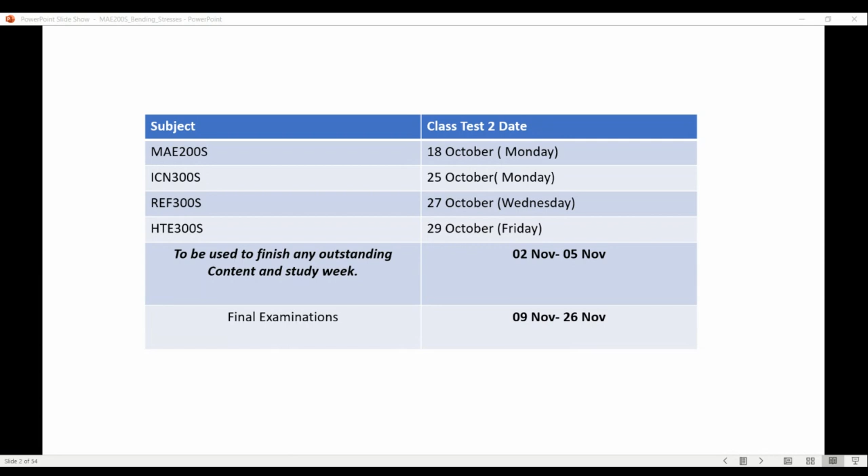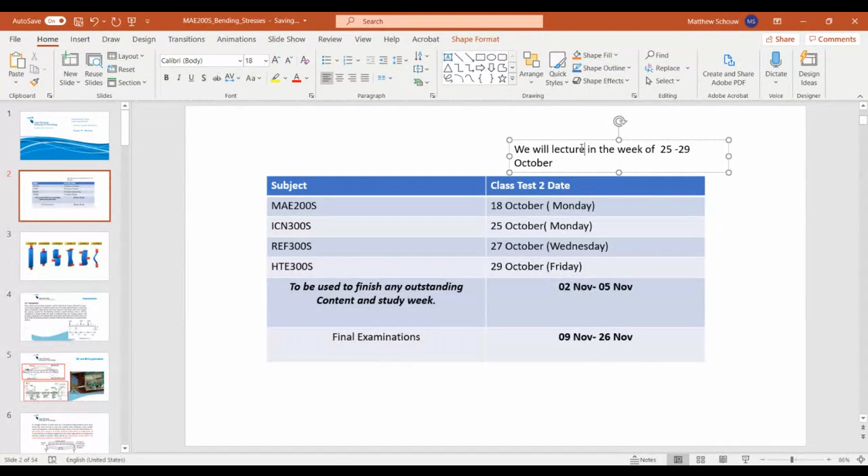All right. And then the other note which I want to include here. Let me just write it here. I will have lectures in between, unfortunately. We will have lectures, right? I should write that here. Lectures in the week. But it's probably like 1 or 2 lectures, just to push out the content. It's recorded, so you have it there. I'm just gonna put that over here. The reason I'm doing that is so that we don't run into that other week. That's my plan. Are there any questions regarding this before we move on?

Before we get into the theory of bending?

Students, let's engage. Musa. Mornings, Jason, Takifa. Yeah, the plan looks good. Thank you, Silas. Thank you. Morning, Musa. So yeah, like I said, I would share the dates. No questions. Okay.

Guys, don't have a lot of anxiety. You must believe in your hard work, and I've set everything up in a way that if you watch my lectures, it encompasses all the stuff that you need to solve. And I think it's challenging enough. We'll have classes. Whatever you've been doing, for the guys who know my flow, just keep along. A lot of students, I don't know if they battle with the content, which I don't really understand why, but you have to keep up the work. Consistency, you cannot bulk session the stuff. The stuff will kill you. You can't do it overnight. You need to keep up.

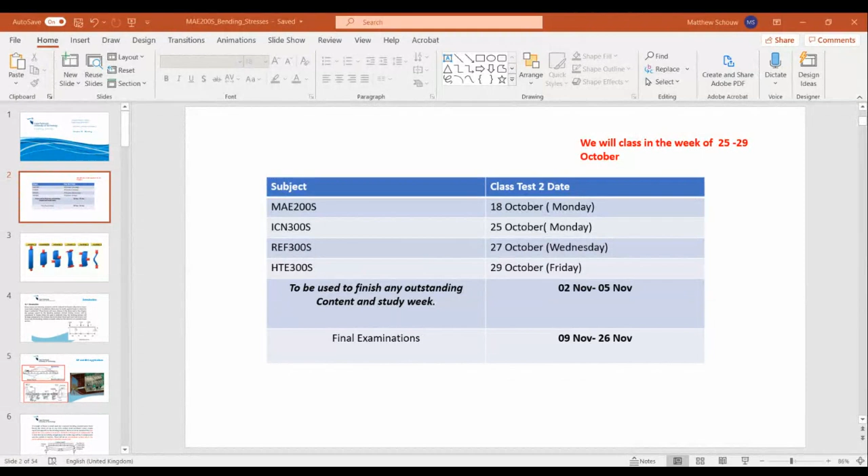I think maybe I should just put this in here. I'll have it over here while I'm here. What is this? It's a scope.

So bending, shear stress, shear stress, shear stress, deflection in beams, right? For electrodes, we're going with sync motors.

Sync and induction motors, this will be shared. I'm pretty sure I'll ensure that I share this. Transformers. It might just be this three, and then transmission lines.

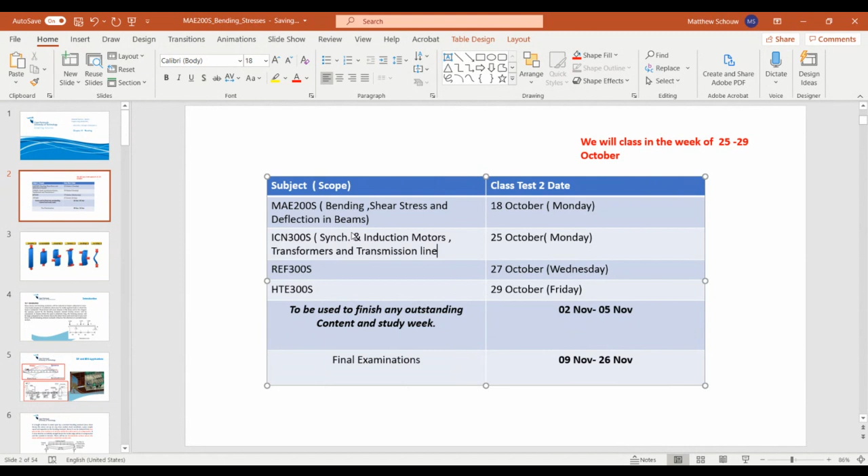Have a look here, I'm going to say something. And testing. No, I don't cover the testing chapter, Mr. Kasser. That's a theory section, right?

And you know what is so sad about that chapter is that I've literally done... I can't cover that chapter. If I were to cover that chapter, I would have taken you back to Mechanics, to the labs. I can't, it's just not part of it. We don't have time for that.

And the nice part about the chapter is because I worked in that field, I will give you the best stuff ever, promise you. I would have given you not the best, but I mean obviously I'm experienced in that field, so it's like the most proper thing ever.

And the reason why I asked, go for it. You recently said a while ago before test 1 that test 2 would be chapter 10, 11, 13, 12 and 14, or yeah, and then chapter 15 will be in the exam.

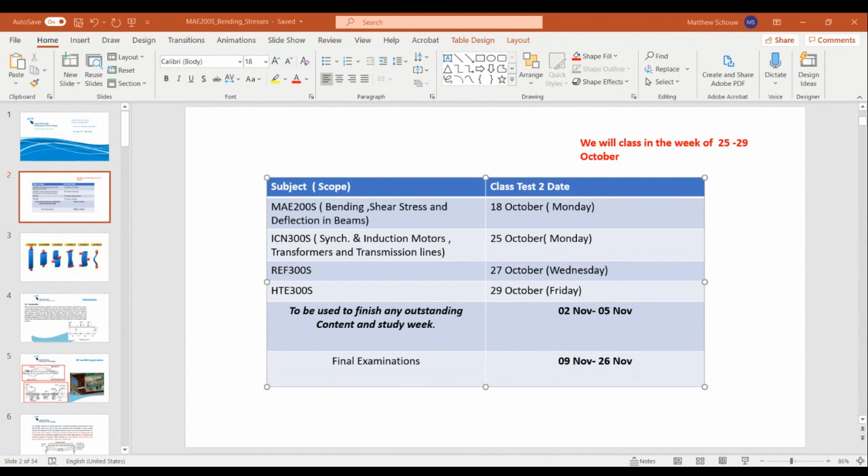So I think I made a mistake. I think I meant chapter 10, 11, 14, and then 15. 15 was in the exam now. So test 2 will be 10, 11, 14. Yeah, that's correct. Sorry about that, I see, you're correct, yeah. Should I have it in brackets here? 10, 11, 14, okay.

That's great, why did that happen? Okay. Yeah, because these, what do you call it, these sections are like a trilogy, man. Yeah, and buckling's on its own. Okay, yeah, so that's one. There's no real chapters here, so this is like arguably four sections.

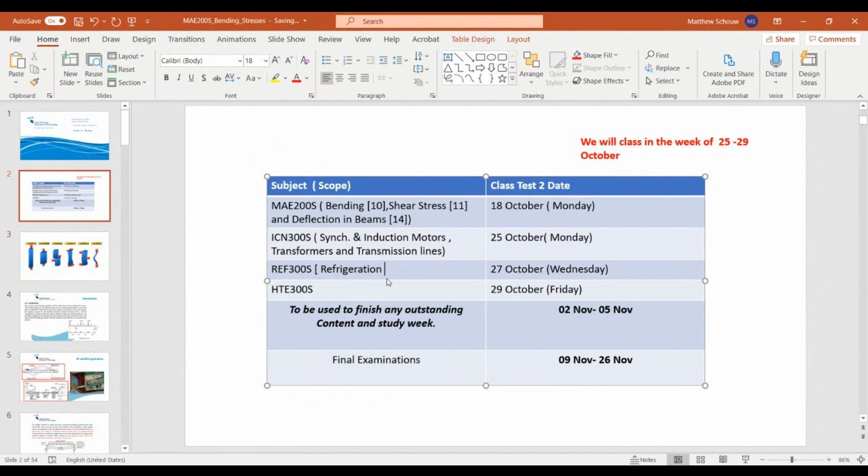For this, we're doing refrigeration section, heat transfer I'm doing after that, air compressors. Right, okay, so that's that.

If you do want to study it, just ask me. Somehow Alex does always ask me. Just that it's a bit tricky sometimes, depending on how I get the content. Heat engines.

This will be... yeah, that's too long to write, but I'm gonna say it's gonna be chapter... where's my theory of machines book? Just give me a moment.

Yeah, I have to just repost this. So chapter 12, 15, 16. And I wonder if I will get to gearing, but I have to see, but it might just be those two with gearing, or just gearing.

The thing is, ideally you want to hit around seven chapters, but it depends obviously, 6 to 7 chapters a subject. I'm just looking for gearing, I don't know why I'm passing it, I'm just looking at gearing. In fact, gearing comes with the other part, but it's just so tight, especially when obviously one spends time in chapter 12.

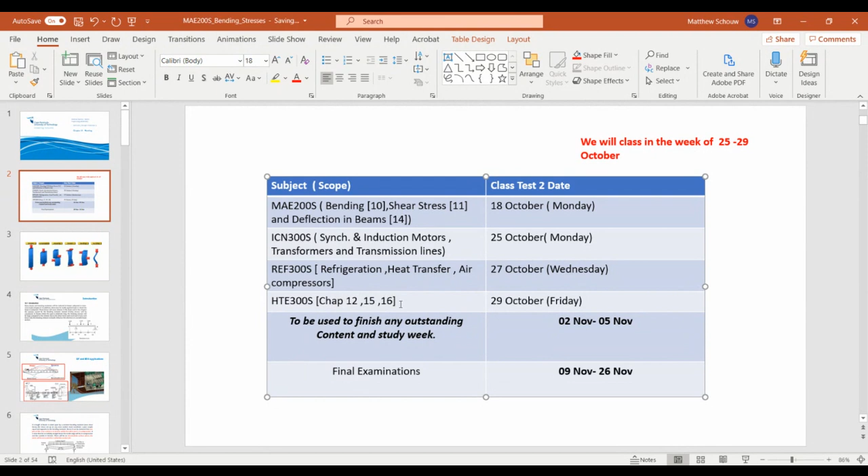It stands this, most definitely probably this, yeah. There's normally one chapter outstanding for the final. I hope that's clear to everyone. You guys get that?

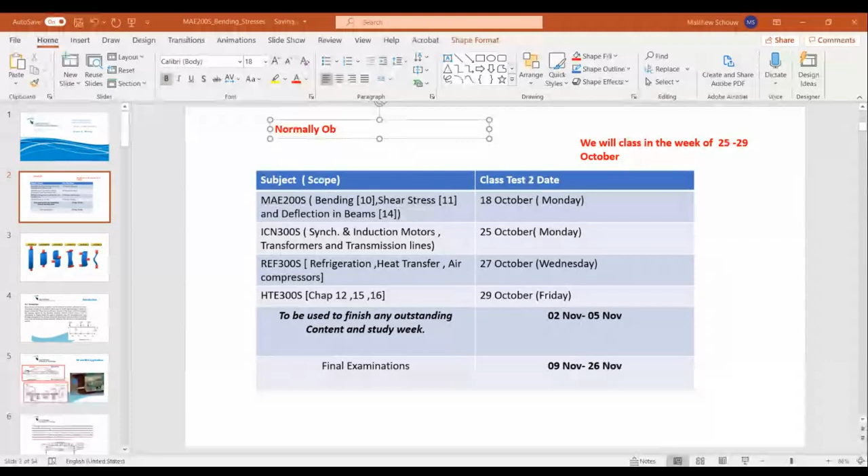Let's have it over here. I think Alex likes structure, man. Doesn't like... what are you talking about, for which subject?

You said there was a chapter outstanding. No, man, that's for all my subjects. I mean, we have one more chapter before the final. Oh, okay. Does it make sense? It's outstanding, one chapter will be covered before the time, covered for final. Normally.

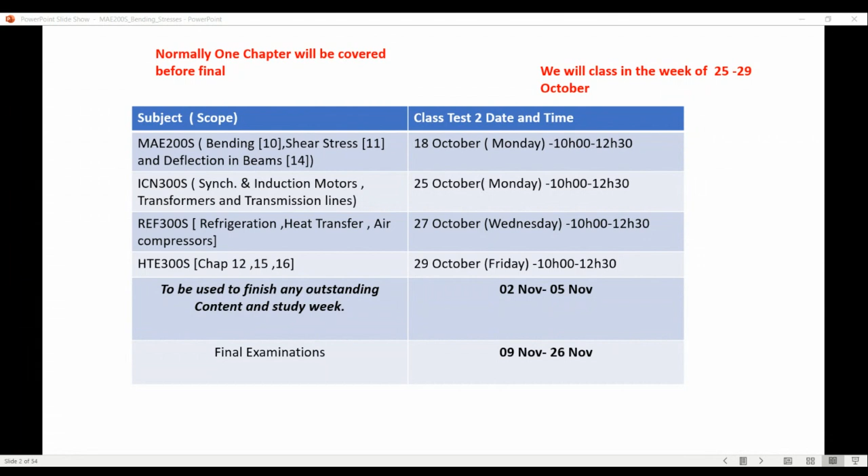All right guys, where are we? So in Strength of Materials 2, we started off with... before I jump the gun, remember I've mentioned to you there are essentially 5 mechanical types, 5 different types of loads in mechanics, right? And I'll just ignore the one on the buckling side.

Of course, that's the main loads. We also get, I guess, all the secondary loads, which I call primary, secondary being, you know, internal pressure due to fluid, like internal vessels, or temperature was another form of loading, right? But obviously I tried to unpack all the main ones. So we've done a bit of tension, yes, arguably done a bit of compression, right, so we've done a bit of tension and compression. You could say the sister and brother, right? They roughly behave the same for steels.

We've got a shear force, which I did cover well this time around, not like last year. I actually spent a lot of time looking at shear force, making sure you understand the area, if you remember your area and perimeter. And of course, on the shearing concept, you kind of went into torsion, right? So torsion would be the twisting force. We covered a whole chapter on that. That is chapter 4 in your textbook, if I remember right.

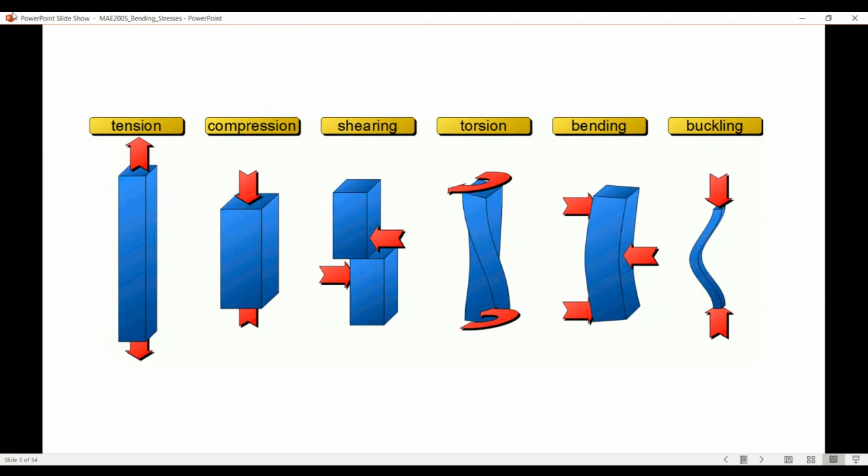So remember we talked about different loads, like tension and compression, that induces direct stresses in the form of tension or compression. We've got shear stresses, which is induced by torsion and shearing, and of course bending as well, which is bending stresses, but also in a different form - we'll unpack that here.

Now, this is a very important thing in the design of beams. In beams where the span is relatively long, the bending stress will be large compared to the stress induced by shear forces and the axial load, if any, and hence only bending stresses normally influence the selection of a suitable beam section, which we'll unpack.

What's important to note - if you have a ruler, for instance, and you fix one end, only about 10 mm, and apply a load on the tip, you notice a considerable amount of bending of the ruler. Normally beams, depending on how long they are, are most likely to fail by bending and not by shear.

With a shorter beam, instead of exposing the longer end, you flip it around and have only about 20 or 30 mm exposed, gripping the rest of the ruler on the other side, and start to apply a force downwards. Shorter beams normally fail by shear.

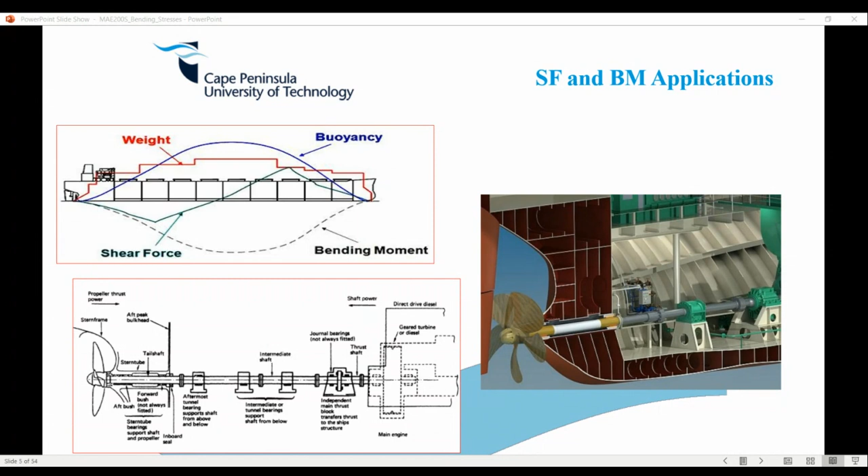Who's aware? I'm going to make a separate slide here and just paste a lot of pictures. Does anyone know the difference between a beam and a girder? Is anyone aware? Just checking.

So guys, we're boarding a bridge. We've got these I-beams over here - that's a beam. I'm going to look for a few more examples; every building literally has beams, right?

Remember, I told you a structure is composed of different structural elements, where truss is one element and beam is another. You can see beams running across here, and obviously that's a truss over there. So there's a beam again.

Size is the main difference - yes, that's it. Obviously girders are longer, beams are shorter. Essentially, you could say a girder is a beam, but a beam is not a girder.

So I'm just looking at some quick stuff over here, I'm nearly done. I don't want to unpack too much of it, but I'm sure you guys have seen beams. I'll just choose this one over here, maybe more wood-based, on the beam and girder thing now quickly. As engineers, whether marine or mechanical engineers, it's just something we really deal with - it's really in our trade.

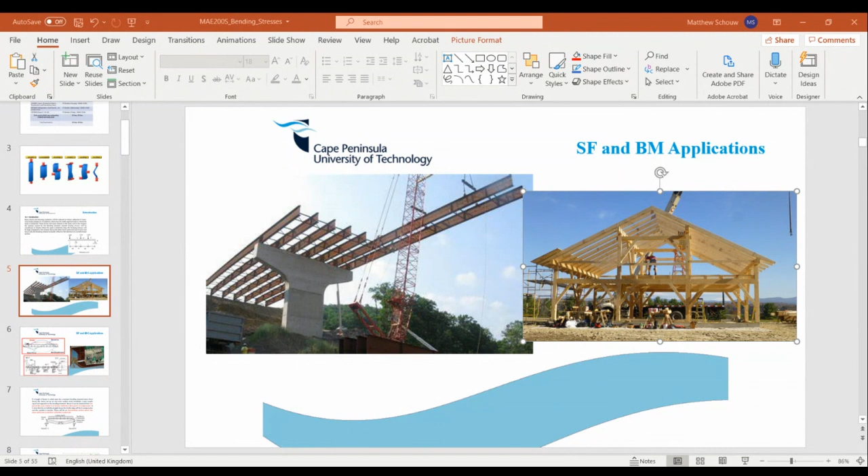But marine or mechanical engineers used to be responsible for structures. So before I get into the beam theory, I just want to really unpack the applications, just to really open your mind further on what a beam could be. So obviously, you've got a vessel, and I don't know if you guys have covered shear force and bending moments in nav arc, and the water will induce a shear force and bending

moments, right? And of course, even with your analysis within your prop shaft or even shafts in general, and this is one of the chapters I wanted to include. It was actually after the deflection of beams, but it's basically shaft design, and obviously we don't have the time for it, and that's the problem.

And within shaft design, the shafts are basically subject to combined bending and twisting, or bending and torque, and you basically do an analysis in both the X and the Y. You take a resultant of the two, and from that you're able to use two formulas. I think it's the Guest-Tresca, and there's another one. And from those formulas, you can decide on what shaft you choose.

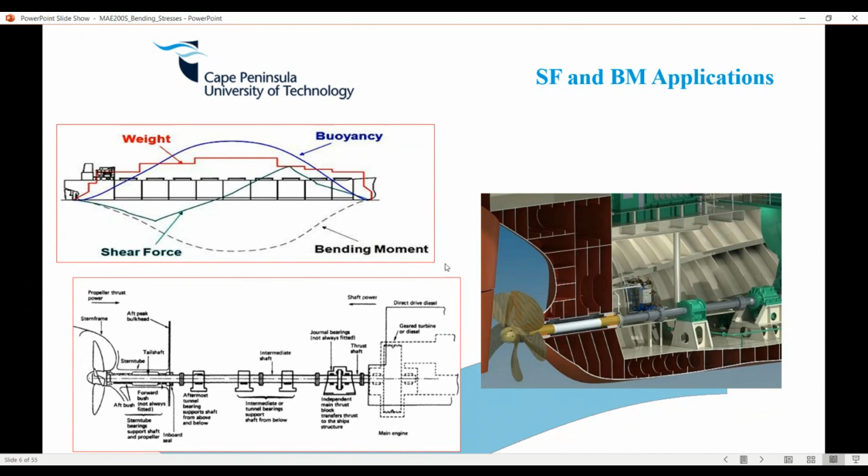So with beams, I guess that's also a structural element, but my point is beams are all over, right? And with the analysis in beams, what we're touching on is the core concept of a beam. Okay, so moving away from the basic applications to where we need to be. So we just go into an explanation, and one is to just imagine what's happening here, right? So if you have a 30 centimeter ruler, fantastic. But you should have one now.

And what is happening here. So I'm just going to explain a very important concept, which will be highlighted throughout the lecture, and our numerical examples will also accentuate that. So if a length of the beam is acted upon by a constant bending moment, don't worry too much about that, but it's gradually applied, and it's before the elastic limit, they say the stress set up in any cross section must constitute a couple equal and opposite to the bending moment.

Okay, fine, no big deal. So we just have a constant bending moment here. And what's important to note, if you take a ruler and you bend it, hence it can be deduced that one part of the cross section is in tension while the other part is in compression. Now this is a very important part to understand. So as you bend the ruler, or you can look at this beam over here, it's simply supported, and as you're bending the beam, you notice that the top part of the beam is being compressed, right? So there's two arrows pointing that way.

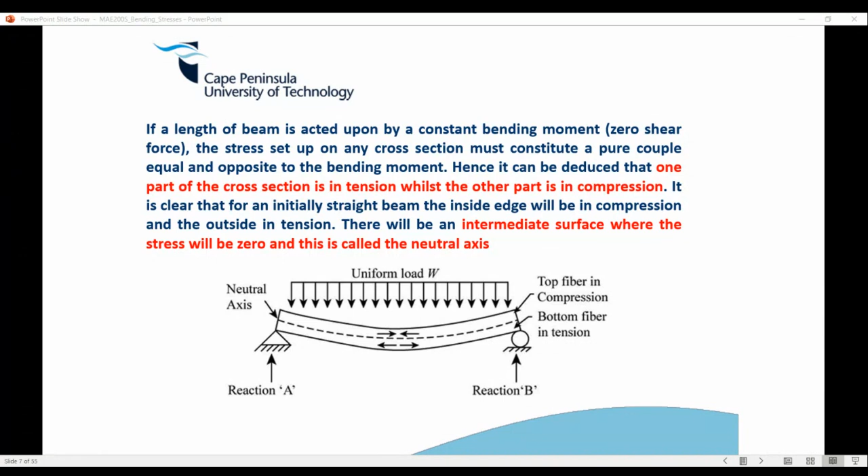So when I looked at this picture, it opened my mind up to realize that beams are everywhere, and the stuff that we're learning is really not general, but core concepts of any structure. And as we load the structure, this is what's actually happening to the structure. So I found this very interesting. And what this also means, from an analysis point of view, is that if you're aware of what kind of loading conditions are induced within whatever member you're doing, that's the kind of analysis or design you need to do in order to make sure that it remains structurally intact for whatever amount of time you want.

Obviously, with our tenderpreneurs here, we don't really care about such stuff. We just take the money and enjoy. But I mean, obviously, if you're into engineering and want to see the country move forward and want to do the right thing, those are the things you want to think about, right?

So when you have a staircase, even the staircase itself has its own set of design. Obviously, there's nothing to really cover. But what's important to note is that even those loading conditions are considered. So that's a special thing. Okay, so rushing into the analysis, not taking too much time on it. I'm just really explaining what bending is, or beam bending, of course. So I just want to touch on all the assumptions here, just in case anyone wants to get fancy.

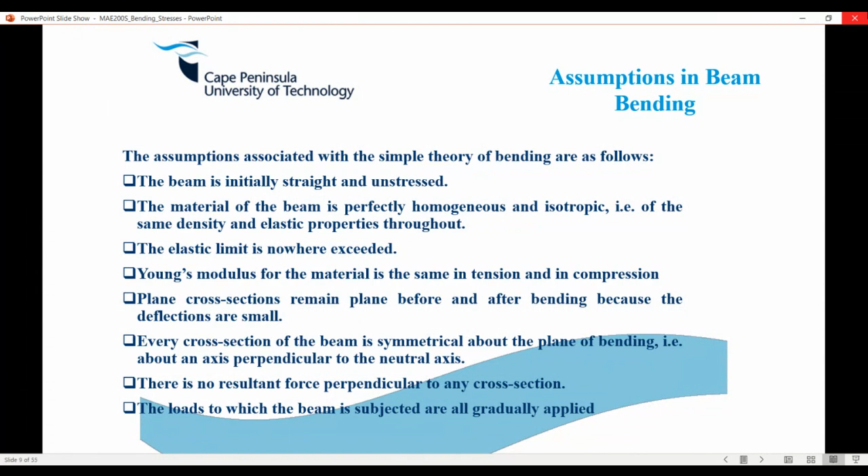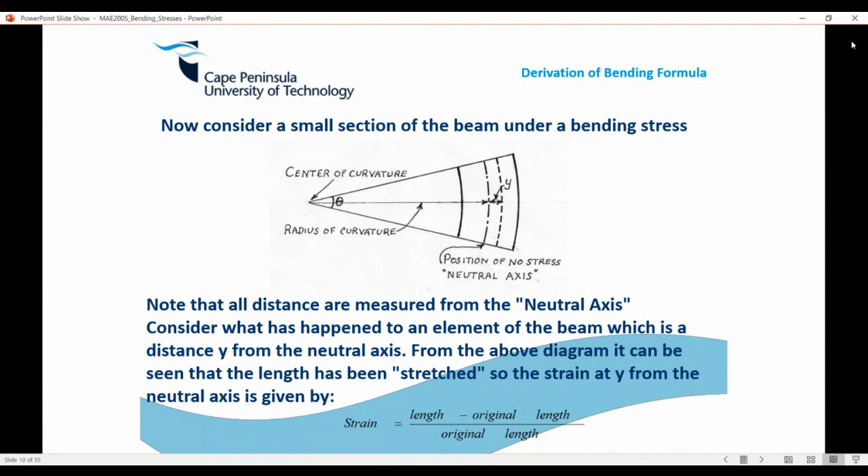So there are a lot of assumptions we make in this analysis to understand bending, right? So just be cognizant of that. Don't think you're a specialist by any means. However, just know this is a good standpoint for you to grasp the concepts of bending. Okay, so what's really happening here? I have to now just plug in my graphics tablet, and I'll show you. I don't spend too much time deriving these formulas, but this one is not that long, and I just want to quickly show you the idea of where it came from. Obviously, I don't expect you to derive these formulas, but I do expect you to have a good understanding, so when you do solve the problems, you're not completely lost.

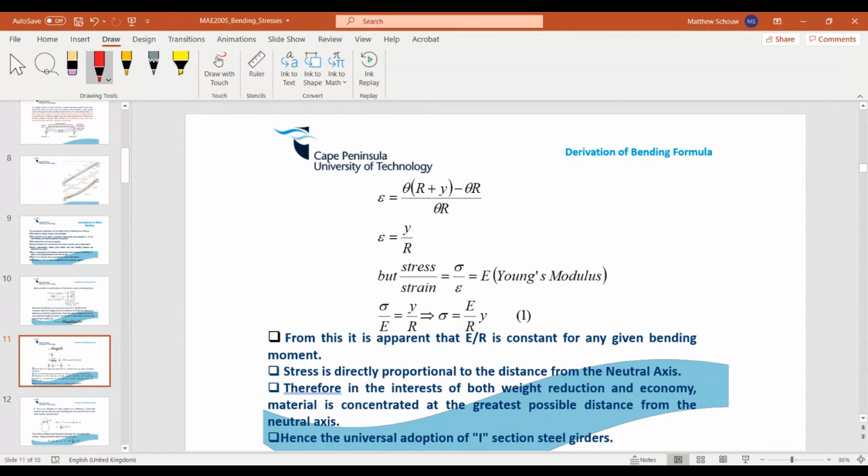Okay, so I was here, and what's happening here is basically, essentially. I need new words in my vocabulary. They're not plugged in. They are plugged in. Just give me a moment. Just trying to find my mouse. Because I'm touching it, it's moving away for some reason. Okay, here we go. That's quite strange. Something's different here. I'm not sure what it is. Just give me a moment quickly. Let me just insert the shape rather.

Insert the shape. I'll just make it a perfect... I'll make this kind of. Yeah. So if you imagine this shape over here, on this blue one. And what happens is we apply a bending moment across the shape, and I can just make this red now. Just make it thicker, make it red.

I don't know why this is doing this now all of a sudden.

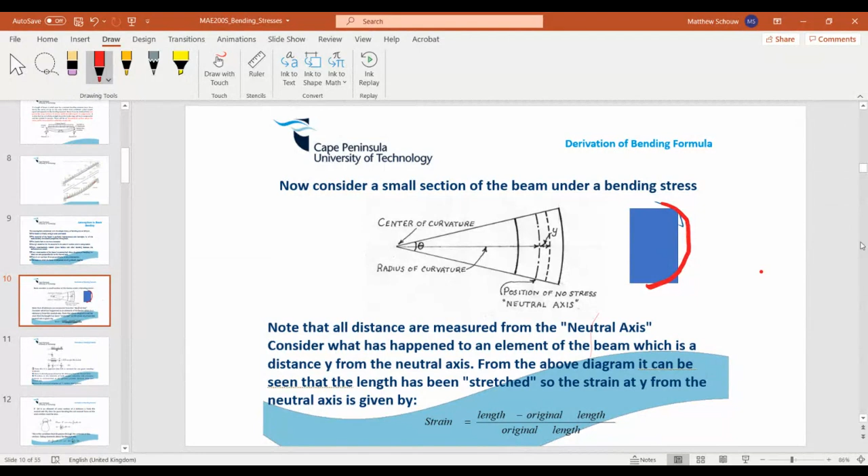So we apply a bending moment like this, some kind of moment, and we get the shape you see on your left hand side here, right? Okay, so what happens is now, I did mention to you there's a point of no stress, which is the neutral axis, right? And what we do, we create this imaginary

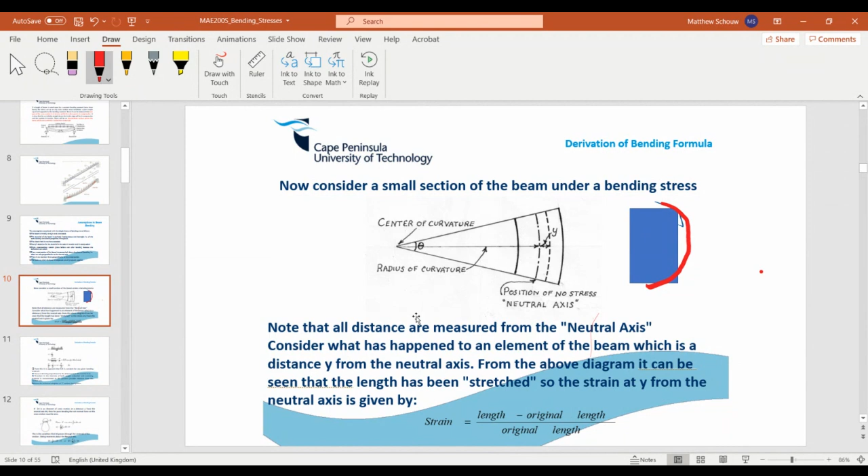center. I can't see the cursor, see, that's why I'm confused. Oh, flip, my keys are already set and everything. It's quite strange. Let's see, okay, I want to sort this out, guys. It's very weird.

So there's an imaginary center over here, somewhere over here, and what we're basically doing here is that we... yeah, nothing has changed. I can feel it's not the same. Anyway, so what you call the center of curvature, and then obviously we have something called the radius of curvature here, right? So this is basically using your math one, if you remember, your radian measure chapter, S equals R times theta.

Oh, this is really weird. And from this, okay, from the diagram, it can be seen that the length has been stretched. So the strain at Y, and then, yeah, so basically, initially we had obviously this length over here, right?

Oh, it's really strange, guys. I don't understand how I feel here.

This length, and as we bend this thing, that has obviously increased, right? The circumference of that piece. Now it's called the circumference, the perimeter of that piece has definitely increased. So that's the change in length there, right? So obviously, if you subtract those two divided by the original length, you're going to get something called the strain. And what they're saying here is that your strain, so if you remember, S equals R times theta, you'll feel like it's something.

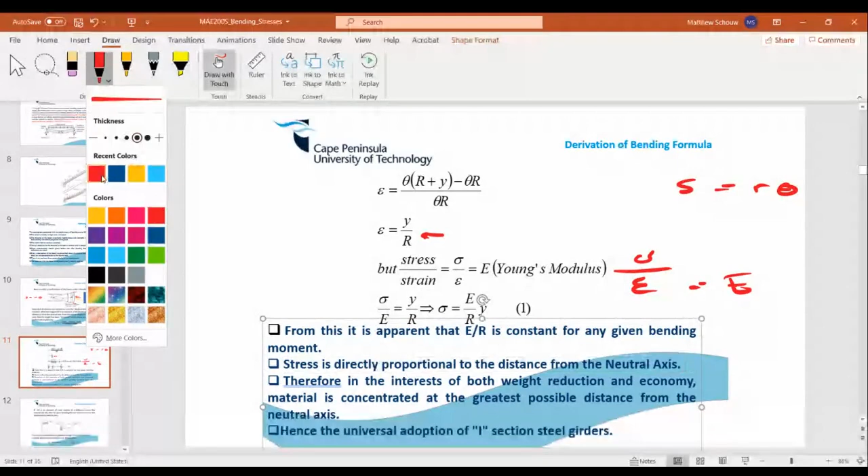So from this it is apparent that E over R is constant for any bending moment. Stress is directly proportional to the distance from the neutral axis. Very important, very, very important. You could not have known this without the analysis. Okay, let me just get back here. Like that, red. 1 minute.

Okay, so red, yep. And they say therefore, in the interest of both weight reduction and economy of material, it's concentrated. Yeah, I was going to say that actually. So based on the second point, one must be cognizant of the fact that we always want to concentrate the material as far away as possible from the neutral axis. Please remember this. There might be an extra 2 marks for you, understanding what this is.

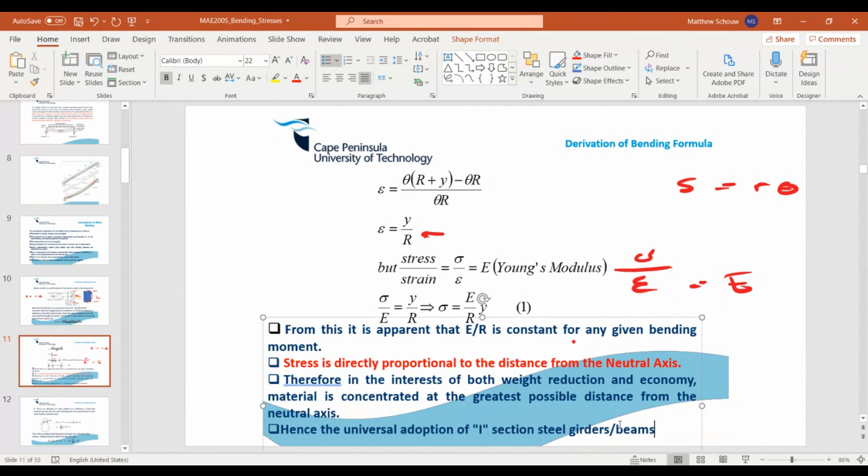And hence the universal adoption of the I-section steel girders, right, or beams. Okay, so if you ever wondered why the I was chosen, it's probably due to this equation here, right? So stress is directly proportional to the distance from the neutral axis. The greater the distance from the neutral axis, the greater the stress induced.

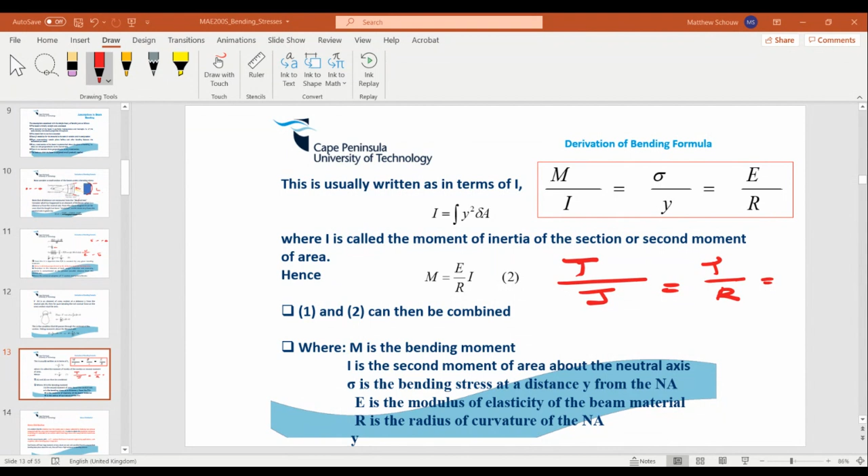So stress over R, right? Equals, yes, go for it. So that I, is that only with respect to one axis or to both axes, X and Y? One axis, yeah. Depends where you're bending. Oh, okay. Yeah, so if you're bending on the X, we use Ixx. If you're bending on the Y, Iyy. And then for this one, we get G theta over L.

So can you see torque is load induced, moment's load induced. I is a second moment property, J is a second moment property. Shear stress, right? R is obviously going to be the radius. It's nearly the same. Of course, R is important. R also tells us, if you remember, the stress distribution through a shaft. It's greater at the ends compared to the inner side. That's why we have the hollow shaft kind of thing.

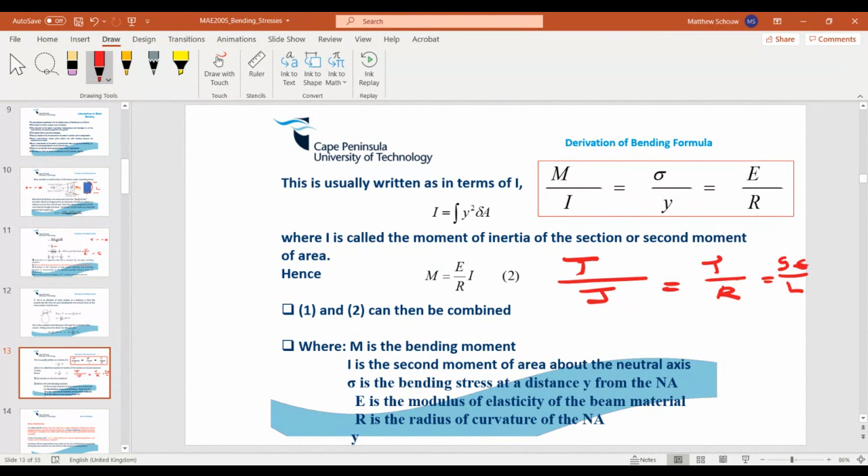You have E, which is analogous to G, and obviously the theta and L will be analogous to the R. So nearly the same kind of thought was actually put into developing the moment formula. So that is the formula you need to know, you must know. There's no getting around it. But anyway, once we have that formula, we start to apply it to a beam. So again, we assume a simply supported beam.

I'm enjoying talking so much. It's a bit of a problem, you know. But anyway, hope you guys appreciate it.

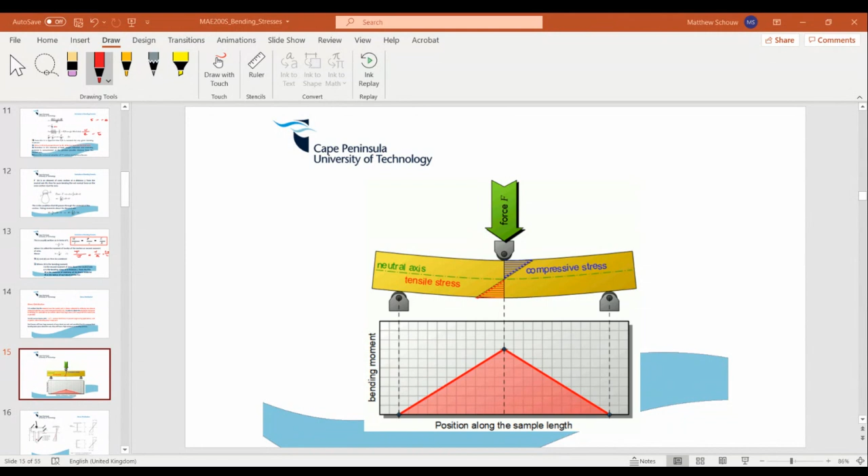Position entlang. I can't speak German. I'm just trying to make that accent.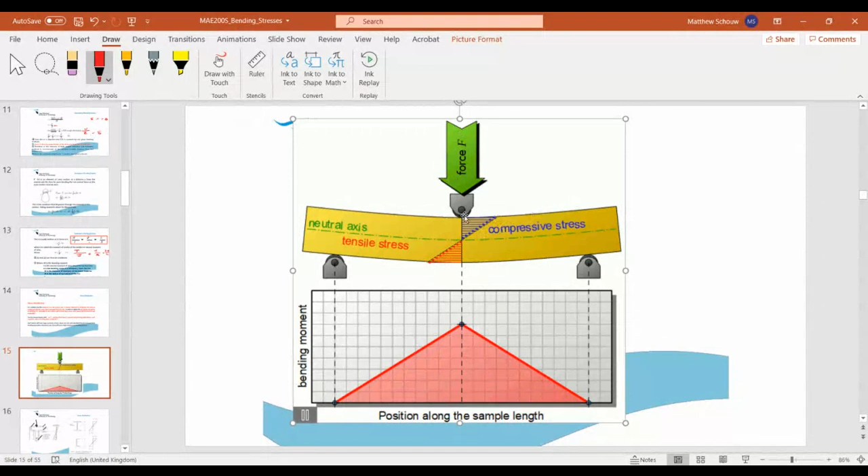So for this nice square beam, do you notice that? Can you see that the blue line's going the other way? It's compressive, and the other side is going tensile. Do you guys see that? And one could say this varies linearly, right, across the cross section of the beam. You guys see that?

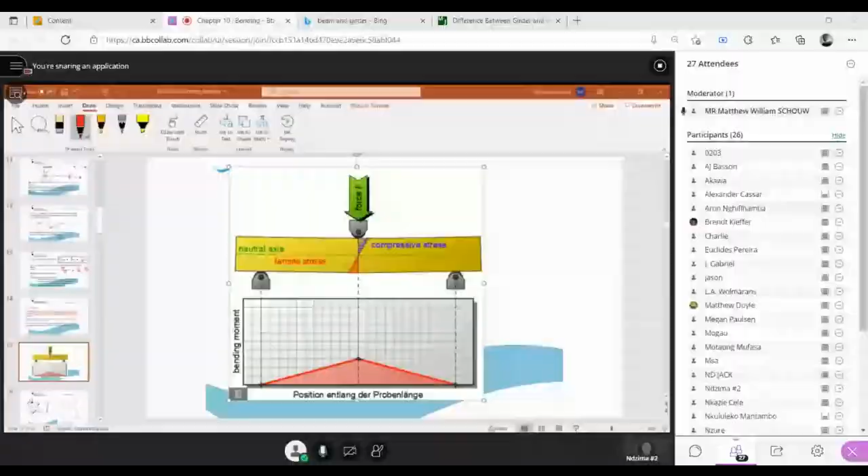So touching on that now. It says it is evident that the material near the neutral axis is always subjected to low stresses compared to areas removed from the axis. So in order to obtain the maximum resistance to bending, it is advised to use sections with large areas as far away from the neutral axis as possible, right? But that doesn't quite make sense to me.

But anyway, for these reasons, I or T sections find favor in present engineering applications, such as girders, where bending plays a large part, a very long beam. And such beams have large moments of area about one axis, to ensure that bending takes place about one axis, about which they'll have high resistance to bending. So that's why your Ix and Iy would differ. So back to the beam and the girder, I wanted to talk about that briefly, but I don't want to unpack it now because it might take some time.

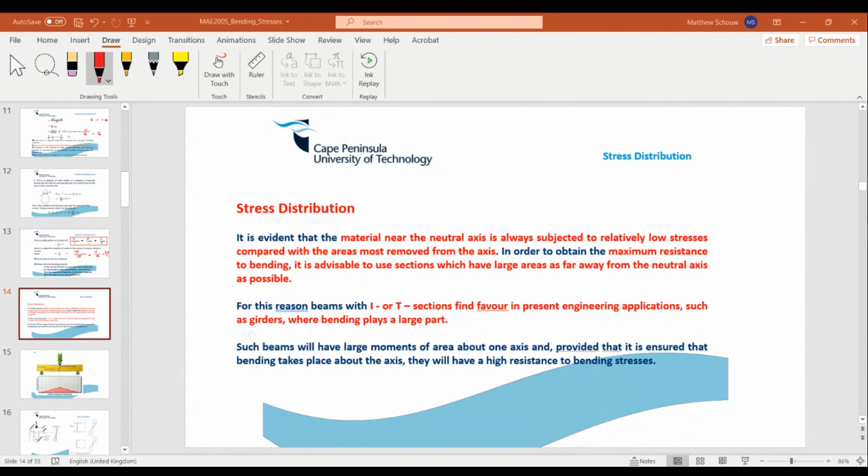But it's a comparison chart, and I just want to show you an example quickly, so if anyone does ask you, you have an idea what a beam and a girder is. So we start touching on the concept of stress distribution, but this is like a small lesson in between. There's a difference between a beam and a girder, which I'll probably have on a separate slide sometime.

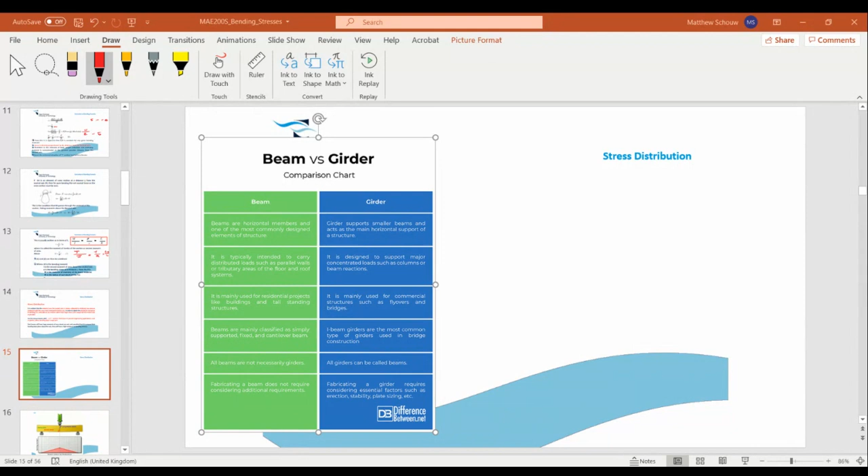And I just want to show you an image, and then I'm basically done. I'll just talk to the image and tell you what it is. It's nothing really important. I'm looking for one of these sketches here. Okay, cool. So this is perfect. Floor beam. I'll just copy those two. So I'll just title this beam and girder.

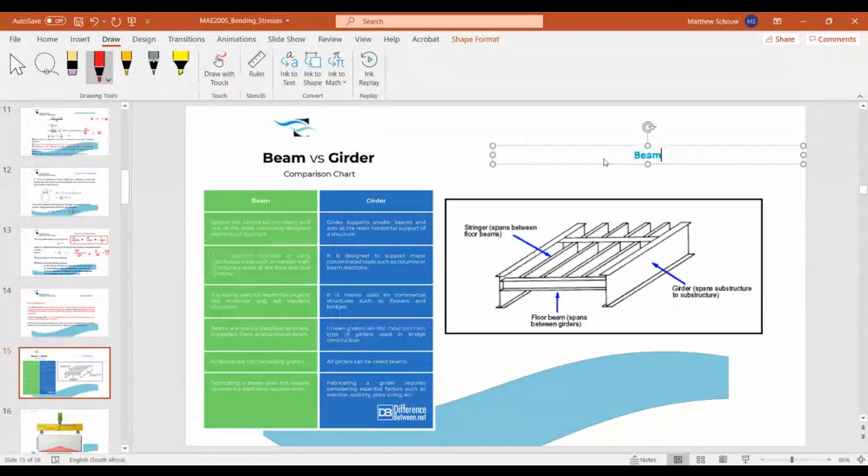Obviously, other concepts I probably should have touched on as well were your flanges and your webs in I-beams. There's some basic terminology which is not really mentioned here. It doesn't really teach you about it. But anyway, I'm just gonna make this bigger. So what it really is when we're talking about a beam is this obvious picture here, let's say it spans between.

Okay, so here are the beams running. I'm gonna say vertical. No, not vertical. Oh, sorry, the beams are like this. No, this is not right. The beams are running across this way. I don't know if you guys can see it. Let me just stick my pen in here. Longitudinally. Yeah, let's say longitudinally. It's running like this. These are the beams, right?

I need to sort my pen out. It's really making me feel uncomfortable.

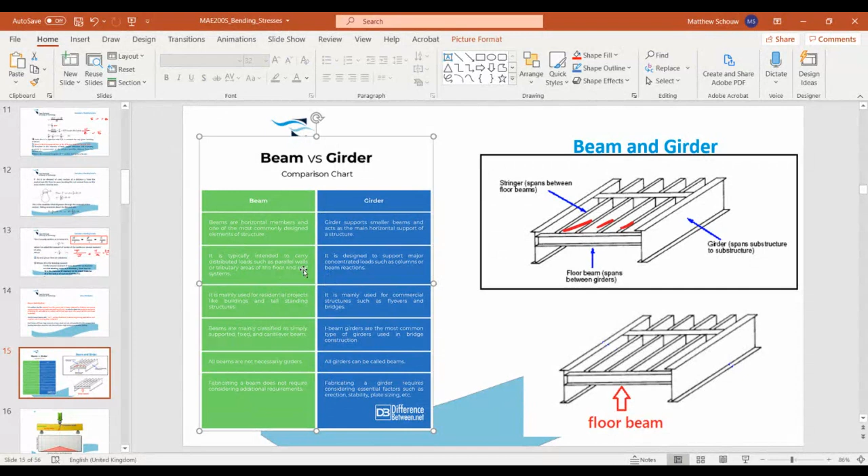So like that. Those are beams, right? So what do they say? They say beams are horizontal members, and one of the most commonly designed structures. Beams are normally intended to carry distributed loads such as parallel walls or tributary areas of the floor and roof systems, right? They say it's basically used for residential projects like buildings, tall standing structures.

Not really important to me now, but a girder is a beam laying horizontally, and it carries each of those beams as a so-called point load. So you could imagine a girder being like that, and then there's different point loads over here, just like that. So that's what the difference really is. Girders are obviously longer, but they support those beams as a point load. Girders support smaller beams and act as the main horizontal support.

So this floor beam here is a girder, even though it's a beam. It's supporting all these other small beams, and then obviously we have the beams over here running longitudinally. So that's the difference between the two, right? As a side note. So back to this distribution, right?

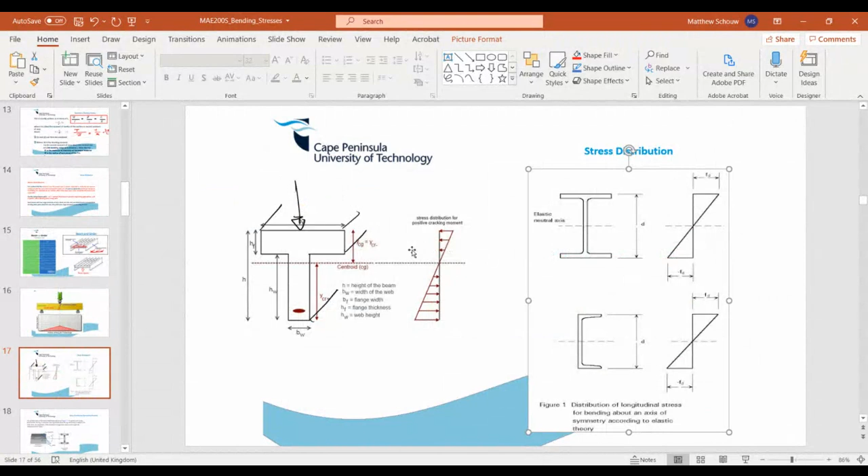So we're aware of how we want certain things. What we're looking at here, I'll start off with this one instead. This is your I section over here, and this is a symmetrical section here, right? And when you have a symmetrical section, really I'm talking a lot. How far am I from the actual stuff here? Okay, I need to move. Is that as you bend the beam, right?

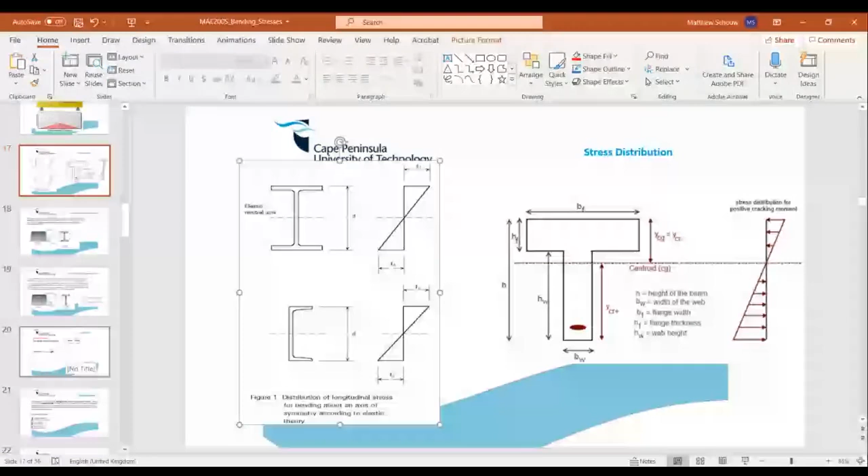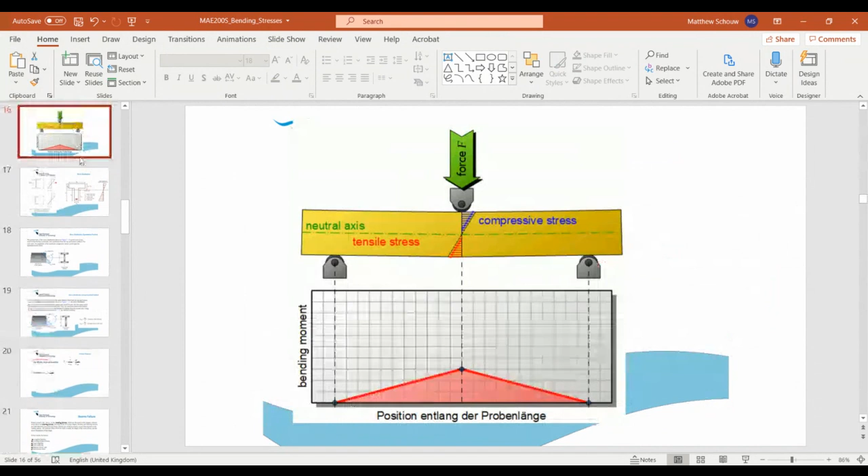Assuming the bending moment is applied, this is going to be tensile. Is it tensile here? Okay, we can call it compressive over here as well. But normally compressive is this way here. It's the negative side, right? And this is tensile. So maybe our beam is being bent the other way. And with symmetrical sections, we have symmetrical bending, right? Which is kind of ideal.

And of course, the sections, if you fold them over this way, they're symmetrical. When you have a symmetrical section, you can see here bending downwards, and your stress distribution is tensile at the bottom and compressive at the top. What's important between the two is that they are equal in magnitude and different in sense. So this is 100 here, and that's also 100 there.

That's the symmetrical section. When you work on an unsymmetrical section, across this axis, you can see that the bottom part of this beam carries most of the stress. So this could be, let's say, 300, and this could maybe just be 150, arguably half for a T section. Again, you must be aware - I think the next slide just talks to this.

It states that the general form of distribution shown in the figure below would occur in any beam having a section whose centroidal axis is equidistant from the top and bottom - equal distances from top to bottom. For such a case, the magnitude of the maximum compressive stress would equal the maximum tensile stress. As you can see in this distribution, compressive going left and tensile right, the distribution is the same.

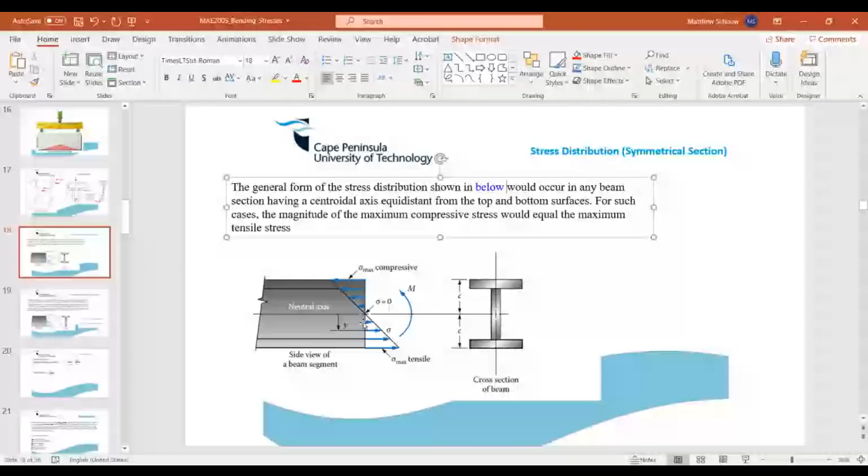And obviously at the neutral axis, there's no stress - that would probably be a good place to join our beam. If you look at an unsymmetrical section like this T section, your centroid is arguably higher up from the bottom, depending on how you look, and you tend to find the maximum stress occurs at the bottom - that's tensile stress - with a small minimum at the top. Well, it depends on where you're looking.

So if the centroidal axis of the section is not the same distance from the top and bottom, the stress distribution still occurs, but stress at the neutral axis is zero. The stress is still linear with distance from the neutral axis. The maximum stress is at the bottom of the section because it's further from the neutral axis - the further we are, the greater the stress. We did mention that. So that's just stress distribution.

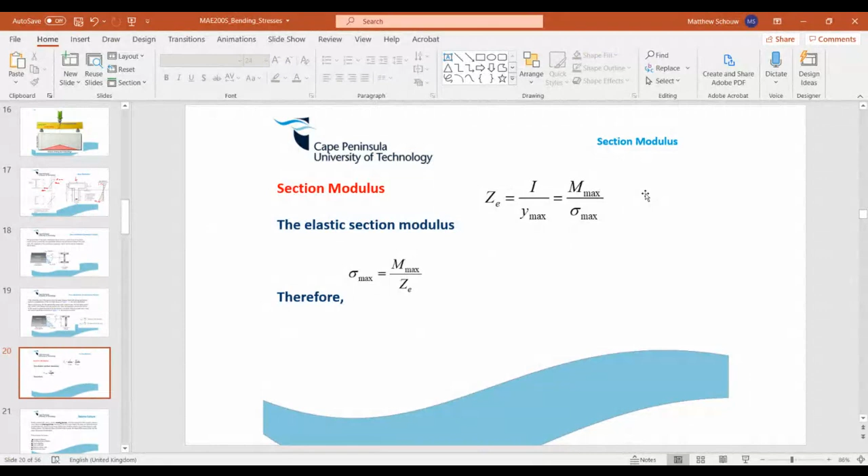Moreover, we have another special property called the section modulus, which we'll be using now - that's basically where it comes from, and it's really a quick rule of thumb way to measure the cross section of a beam. I wonder if I'm going to touch on that, but I'll probably touch on it afterwards.

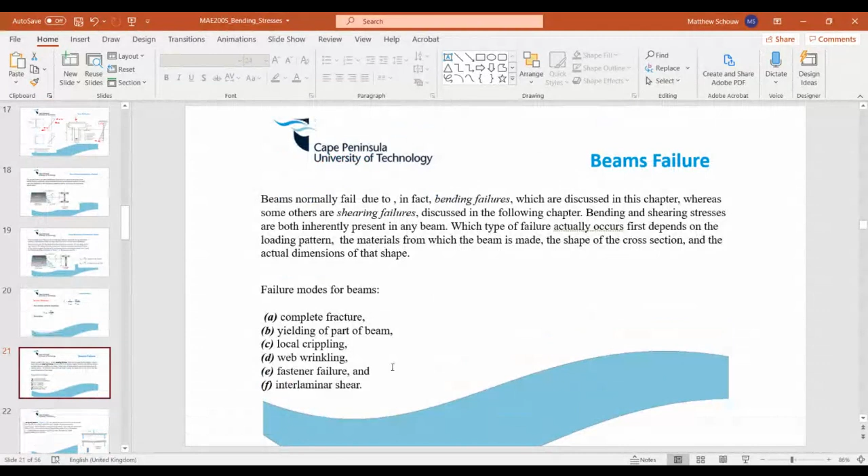Over here is beam failure. I will not touch on this now because it's not really part of what we need to do, but it's just some more background knowledge.

Okay, so here we can start on a basic example. I think I wanted to probably start with - yeah, okay, so let's just follow the idea of the textbook here. And so we're going to start with example 10.1.

Just to make you aware, this typical question you're seeing is normally an add-on question - it's not one of the core questions, but it's normally an add-on question about what's happening, about how do we select the beam. Basically when we're selecting the beam, I feel there's a big jump in terms of content, but anyway, it's fine - how do we select the beam?

Let's say the following criteria must govern the selection of the beams: the maximum bending moment, the maximum shear force, the width of the section, the cost of the beam, the maximum allowed deflection. The vertical axis must be the axis of symmetry - it must have axis of symmetry. And probably the most important one: it must be as light as possible.

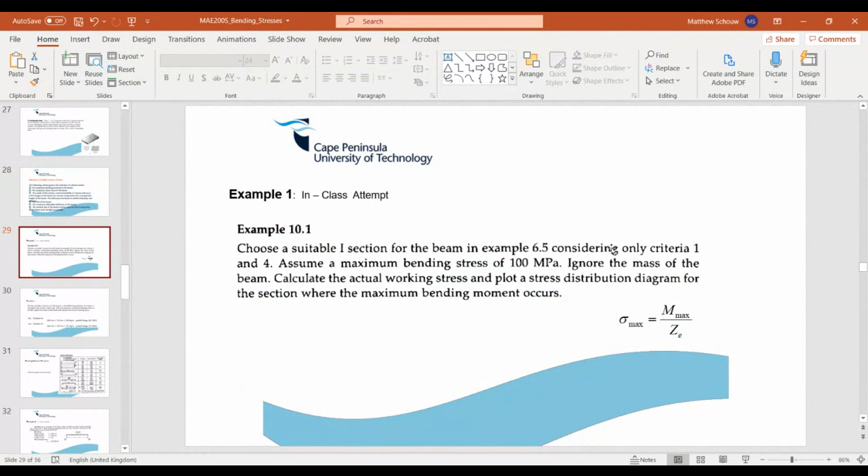So what we're going to do now is select a beam, assuming we've done the analysis. This is the first example, so I'm going to look for the example quickly. Like I said, this is an add-on question, doesn't really encapsulate what we're going to be trying to do. We'll get there - I guess the first half of this lecture will just be me talking, and then we can actually start unpacking all the stuff.

Okay, so I'm just looking for example 6.5 quickly, just so we all have a visual in mind. We can actually start on example 6.5.

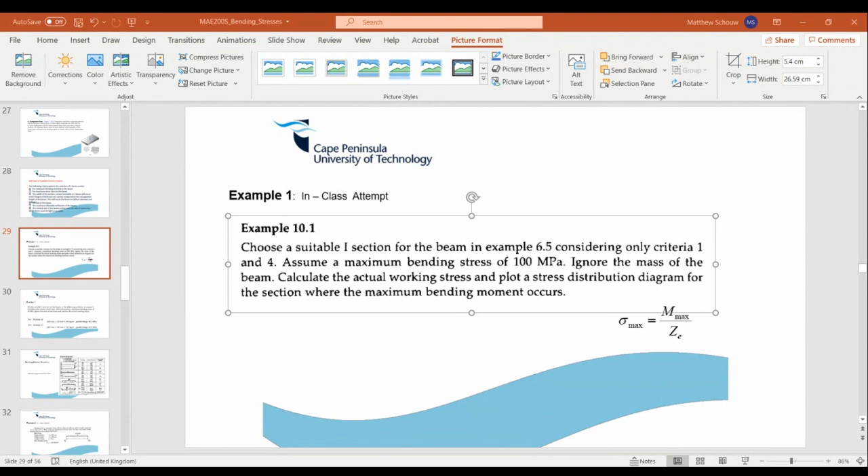6.5, yeah. So, just gonna snip him. He snipped. Oh, I don't want that.

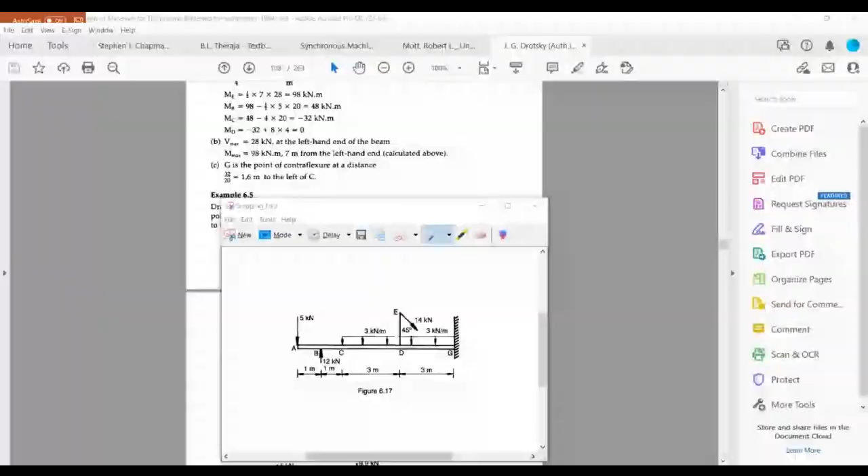Okay, so example 6.5 is in your textbook, and it looks like this. Obviously, where this example initially starts. This is an important thing because you will get this as a sub question. Page 95. Thank you, Mr. Kasser.

If you do your shear force and bending moment diagrams, right, this is where it kind of runs on to. You're going to end up with something like this. So let me just quickly copy and paste this.

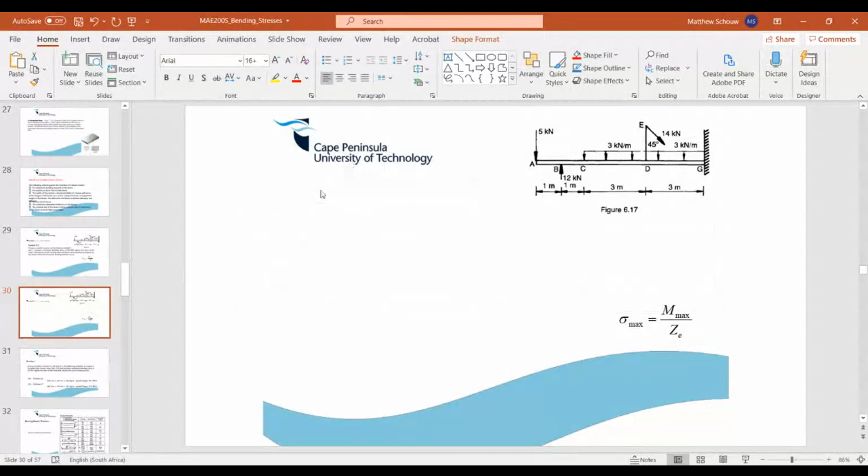So I'm gonna unpack this. It seems vague, but it's not. This is an add-on question. You start doing it properly now. But this is the way. I don't know why this chapter itself, the way it's set out. I don't know. I have an extra note which I use, and this one panel, which works out better.

So initially we have our beam, and we do our shear force and bending moment analysis. And then we end up with this, right? So what's important here is to look for the maximum shear force and the maximum bending moment, because we're looking at bending, and the maximum bending moment occurred over here, right? Once you find the maximum bending moment, you can head off back to your formula over here. This formula is to do the section modulus.

So what is the purpose of this question? They're saying choose a suitable I-section for the beam in example 6.5, considering only one criteria, 1 to 4, which is this criteria over here, right? So obviously, I ideally want to choose all the criteria, but anyway, just ignore that.

So assuming a maximum bending stress of 100 megapascals, what they're saying is we can't exceed 100 megapascals. Obviously, it's within the elastic limit, but this is our working stress. Ignore the mass of the beam, and they say calculate the actual working stress and plot the stress distribution diagram for the section where the maximum bending moment occurs, right?

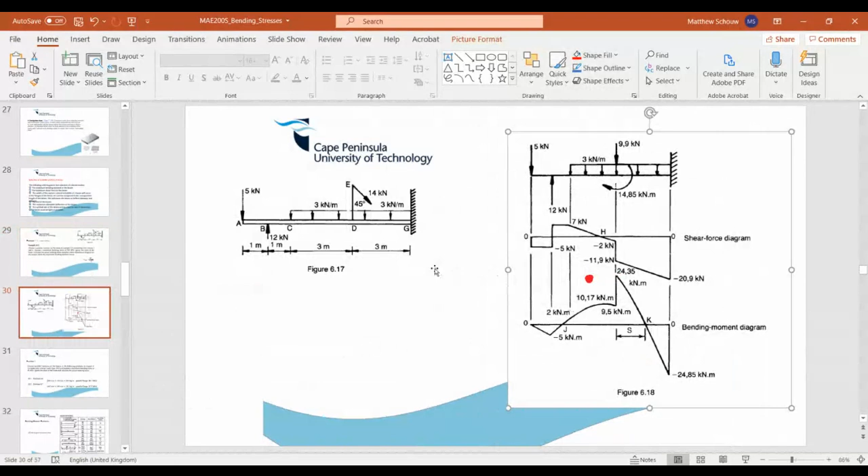So looking at the variables, we have the maximum bending stress, and also we have the moment, right? The maximum moment was given to us over here. So if you look at our formula, right, Z is the section modulus. So if you're gonna look at the tables, the steel tables at the back, you're gonna see ZE, where you see your I, E, and ZE, and the units are times 10 to the power 3, right? 10 to the 3. So you take your maximum stress.

How do I change this, guys? Okay, so your maximum stress is 100 megapascals. Our maximum bending moment is 24.35 kilonewtons, and we divide it by ZE.

Did the book make a mistake, sir? Because in 10.1 they said the maximum bending moment is minus 24.85. You're using 24.35. Let me have a look. Maybe I used the wrong example. Just check 6.5 quickly. It's probably me, man. Yeah, the example is 24.35. Okay, I'm looking and I'm thinking. 10.1 it says minus 24.85.

Doesn't really make a difference to the answer. You still get the same answer. Oh, I see, it's quite strange here. 24.85. Yeah, I wonder. But let's have a look anyway. Our ZE will be slightly off. Yeah, we can go with the book really, it makes no difference to me. We can go 24.85. Obviously, I think the book made a mistake here.

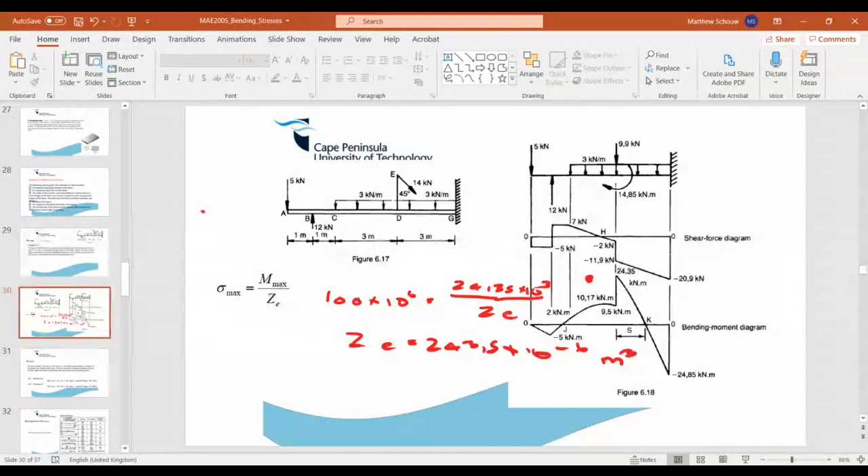Let's call it the x-axis for now. I'm looking at this beam, considering it as being bent, giving it an arbitrary shape here. Obviously it's being bent across the x-axis, so in this case the loads are all going down, so this should be the x.

I don't know what's going on with my hand, it looks shaky. That's not X, sorry.

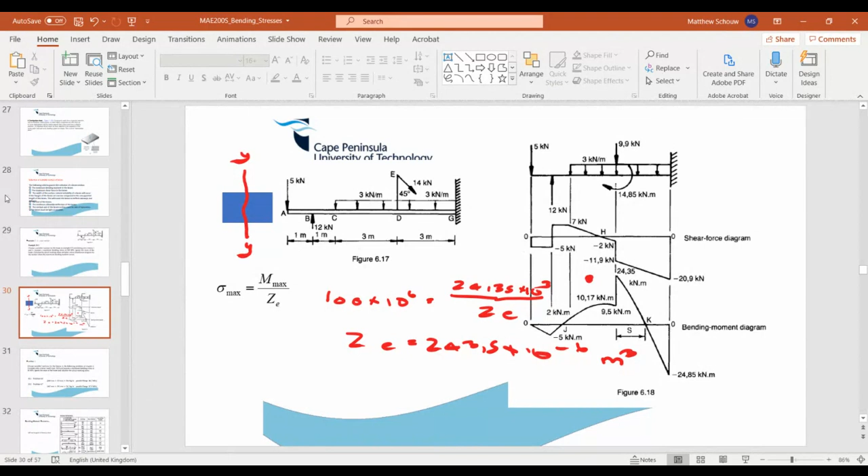Okay, anyway, so obviously X is across the other side here, so we're looking at the X here. I just want to get up my steel tables quickly.

I'm starting on this, I don't want to spend too much time on it. I'm just showing you the way the textbook is moving along here, looking at any Z section for the x-axis. Let me share the PDF with you.

There should definitely be a sub question within the textbook, so be cognizant of that. I'm not shocked if you don't see it, could be a good 4-mark question somewhere. There's a few of these questions in your exercises.

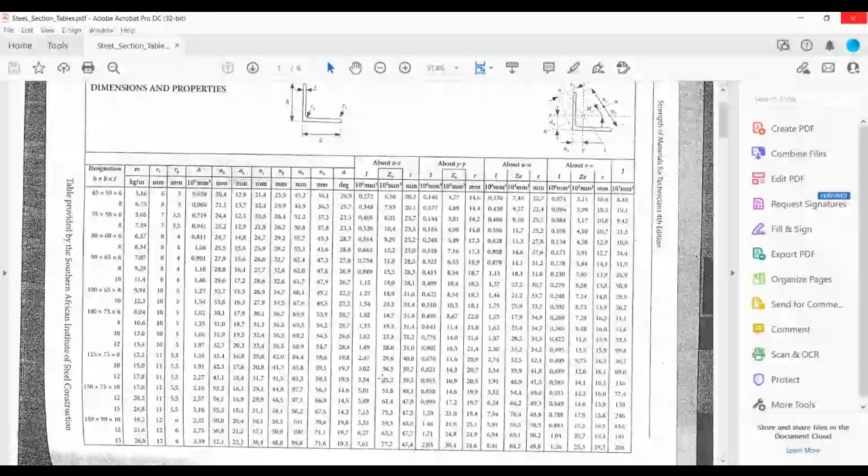So if you look at the table, we're looking for the ZE value about x, which was 24.35. I'm looking at all these here, and this is all small, I don't know if you guys can see it, maybe we should zoom it up a bit.

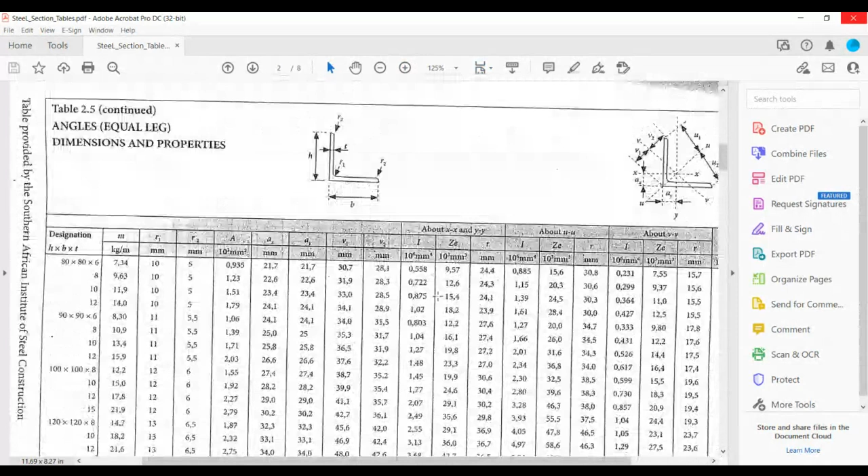So it asks for a suitable I section, but we have to look at the ZE. Oh, it tells us - sorry, I was just kind of going through showing you guys. Anyway, it's fine, so obviously they want an I section, but I'm just showing you, so for instance...

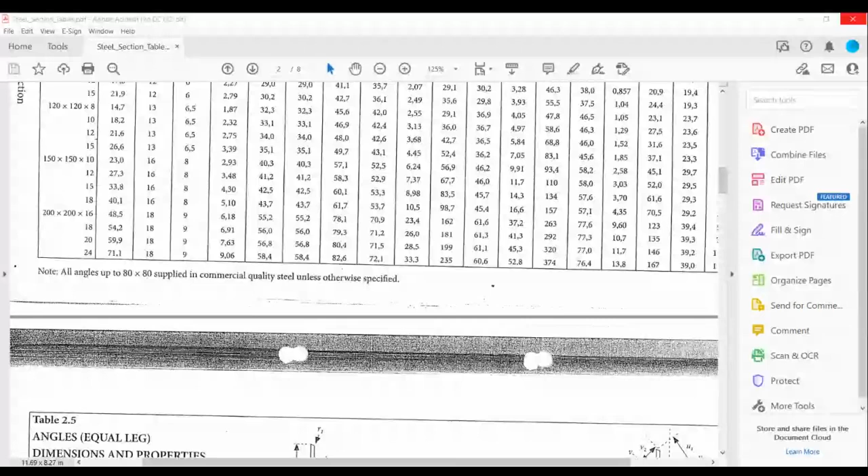What comes close on the L section or equal leg? We've got 235 there, but that's not close, we wanted 235, no, 245 or 243, so that's also not suitable. Obviously scroll down to the I sections, I'm not going to waste time. If you look at that, we could have chosen 471, that is one candidate - 203 by 152 by 52. But obviously if we choose that one, it's way over what we require.

If you look at kilogram per meter, and we normally buy steel per meter, that'll be overkill, right? So we're gonna find something more closer.

I'm just gonna check what answers they have here, just to see. So out of those, that's one correct answer, but that's obviously one option. I'm gonna write it on my slides as well, just to show you there are other options.

The one that you chose, that means there would be a very high safety factor, correct? No, it's just overkill, man. I wouldn't say high safety factor, it's more like it's really more than what we need actually.

The problem is we look at the mass, the kilogram per meter is like 52, and it's just like an overkill thing. I'll just go 2 or 3, anything higher basically, that's the idea, but you'll see now.

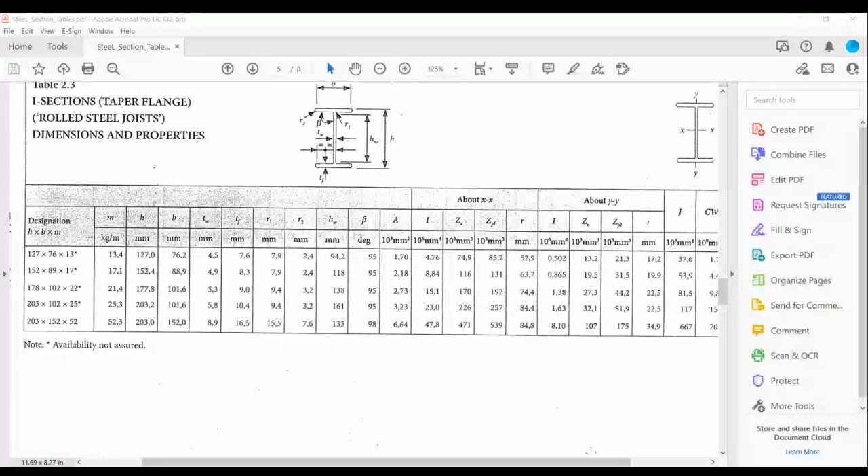But obviously as engineers we don't just choose arbitrarily, it depends on how much money we have in the company and stuff. So I'm just choosing one section, I'm writing my next one now. Let's scroll, so that's one.

Over here is your H section, universal column, and we're looking for anything close to 235. We've got another one here, 274, so we could have chosen all of these, that would have been adequate for your section modulus, but the 275 one seems a bit close - 152 by 152 by 37, that's another one, so take that one.

152 by 152 by 37. What answers do they have? Oh, they chose the same one I should have, let me have a look. I don't even know which one is this, so the H section, right, that's the H. I can't see this cursor.

The other one's an I section. Okay, again, let's look at more. So we want one in the region of 270 something, right? Or 200 and something. This is now the parallel one, and I'm looking at my x-axis here. They all look massive here, right? So we could have taken this one as well, yeah. The 563, that's also a bit too much. 203 by 133 by 30 as well, you could take.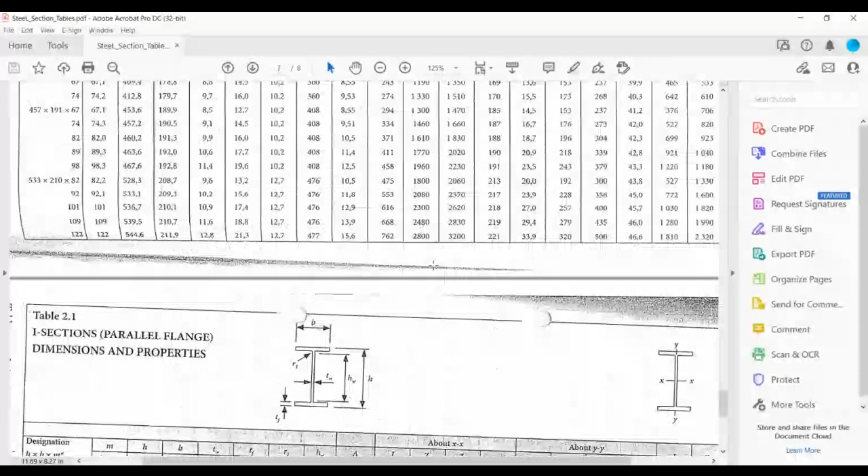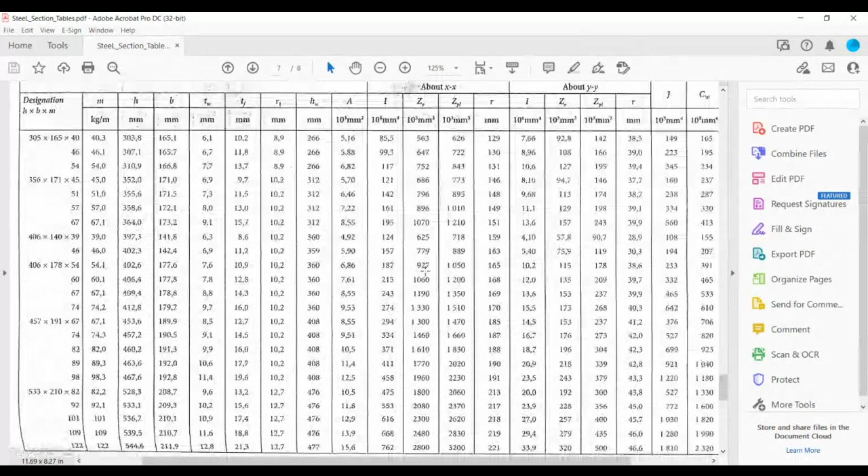Which one was it? Just go back. Are you talking about the parallel flange for your I section? Yeah, which one? The bottom of the page, universal beams. Universal beams, okay, like this one. The little bottom section. Oh yeah, I'm with you, got it. 203 by 133 by 30. Yep, fantastic, that's the other one. That's close enough, obviously. So 203 by 133 by 30. Yeah.

You want something higher, right? And so there's three sections you can choose, and if you're going to decide on which section to choose, the idea is to do the mass, right? And I think what they've decided to choose is the 203 by 152. What did they choose? Okay, anyway, I'll revert back and see what they chose. Okay, so that's what we chose: 305 by 102 by 25.

Is it the same as ours? It's the 286. The third from the bottom. Is it in the same thing? Third from the bottom. So we have the 286 one here, right? This one over here. Yeah, it's 286. Okay, so 305 by 102 parallel flange. Okay, cool. So they chose this one.

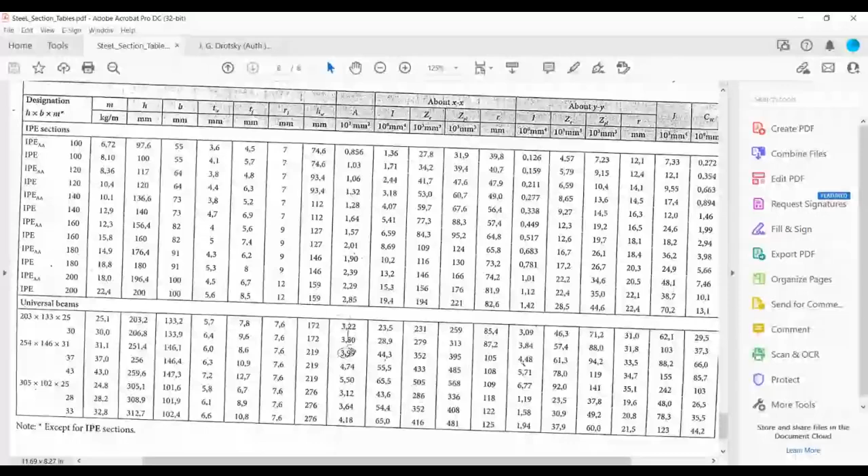Okay, let me just cut this now. Okay, cool. Now let me go back to the share. Share this. Yep. This is here.

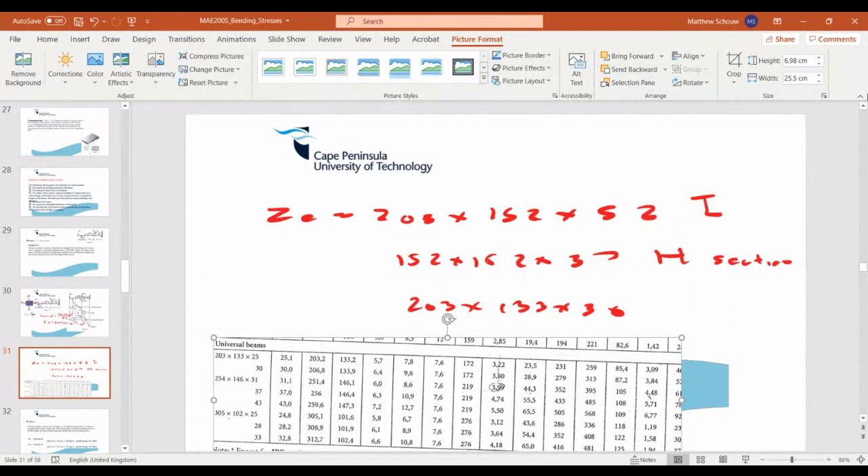So there's another section they chose. There's also I section, there's H. They wanted I sections anyway; I just went for the H, but you can choose something close. So they chose basically for this universal beam this one here, and this one over here. Now I want to ask you, why do you think they chose the 305 section and not the 203 section? Equally would have been good with the section modulus, it didn't really make a difference. Who can tell me?

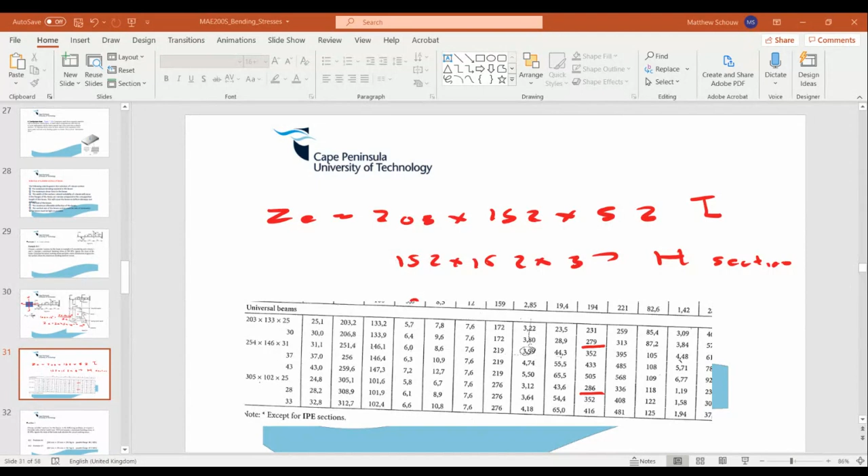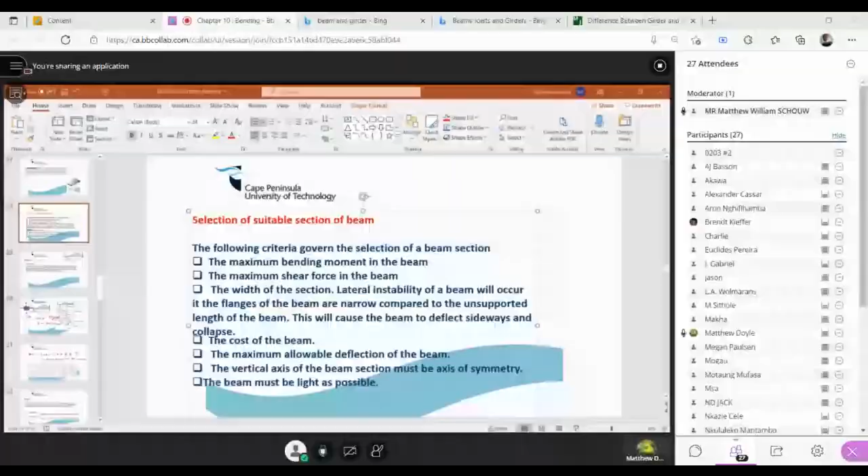So going back here, you guys are a bit lost. So criteria 1 to 4, eh? Would it be the cost of the beam? Yes, but talk a bit more. Why cost? Because you pay per meter of steel, at least for the quality of steel anyway. So if you overshoot the mark that you're supposed to be aiming for, it'll obviously cost more and it's unnecessary.

So basically what I'm looking for is that this one is 30 kilogram per meter, and the other one is 25. So we have another section with 25 kilogram per meter, and that is a better section modulus than that one. So we will rather opt for this one, because we don't know how much it really costs, so we're looking for the lighter beam basically: 25 kilograms per meter versus 30. So we're going for the one with the less M. I hope you got that, right?

Remember, the designation is h by b times M for the beams. Even example 10.1 says that you're considering only criteria 1 and 4, which is the maximum bending moment and as light as possible. We could find out that the 203 by 133 by 30 costs cheaper than the 305, because of manufacturing cost; they could even be the same price. But we're just considering those four criteria. So anyway, you've chosen your section, the 286, and once you've done that, I can just add a new slide here.

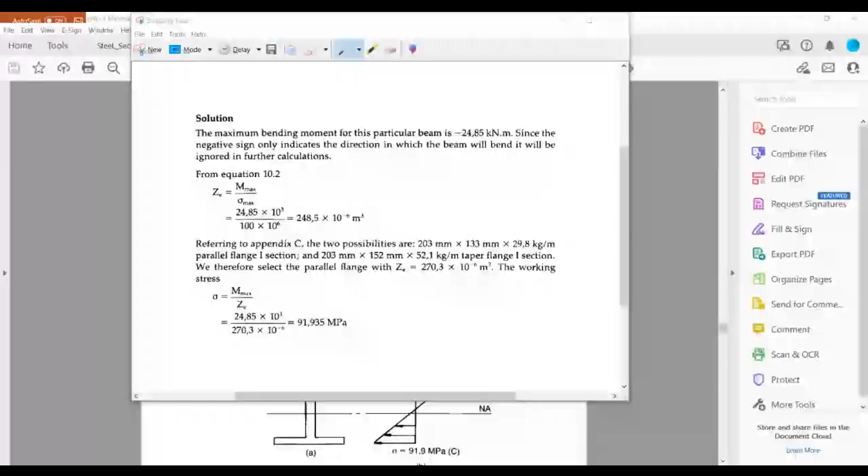And just quickly, there's a quick rule of thumb calculation which is helpful. I'm just going to copy the solution, so I don't have to resketch the whole thing. So what you basically do is revert back to that formula. Oh yeah, so now we found ZE, right? And now we have to find, no, don't do that. Okay, like this. We just basically go back to the formula.

So we found ZE. From ZE, you can choose certain beams. Okay, they have different ones they've chosen. Right? They selected a different parallel flange. Doesn't really make a difference to us. And then all you do is take your maximum moment again divided by that new section. In our case, it's 286 here. So ignore this here, this is the old one. Yeah. So if you do that quickly,

For our one, hey, I'm hearing sounds, Alex, Matthew, just mute. Oh, sorry, that's me, sir. Bye.

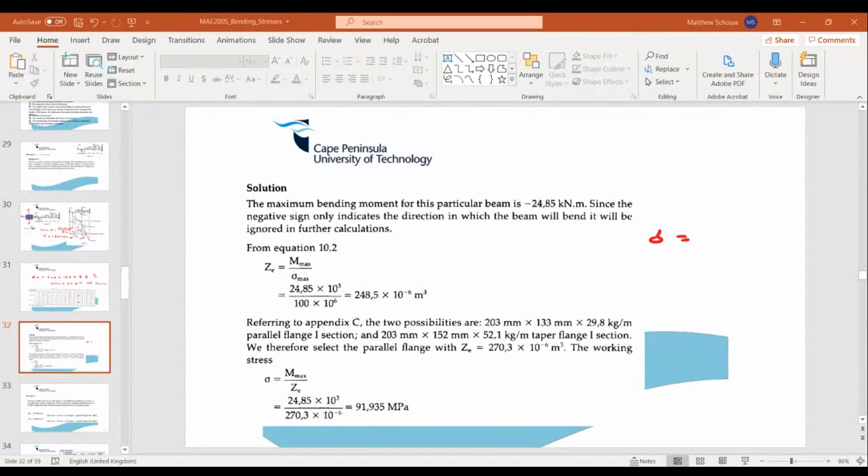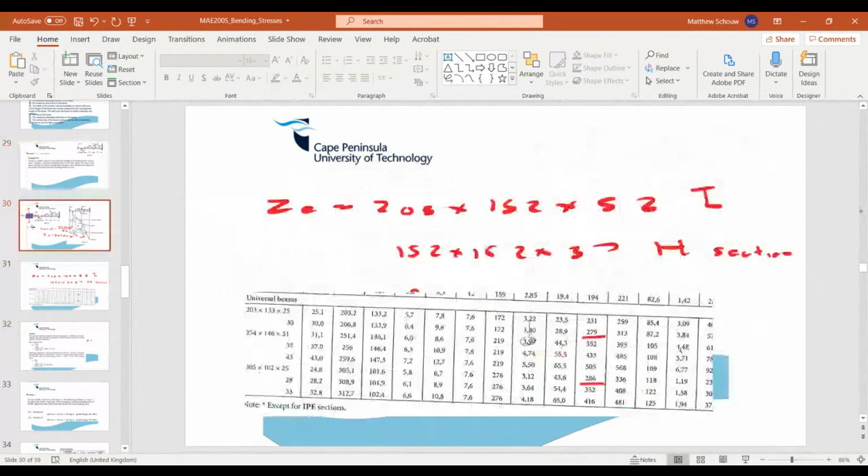We just take our allowable stress. I think that was given as 100 megapascals, if I'm correct. We're looking at the new stress. So our moment was 24.85 kilonewton metres, and our new section is 286 times 10 to the power -6. And your new stress would be, I'm not sure exactly what it would be.

Okay, so guys, what I recommend now, we're taking a 15-minute break. And then once we return, we're going to start on the normal computations, the ones I expect you to do. So try and do this problem. That's the first two problems in your textbook to choose the beams. Please go over it. You'll be a fool not to. So try 10.1, 10.2.

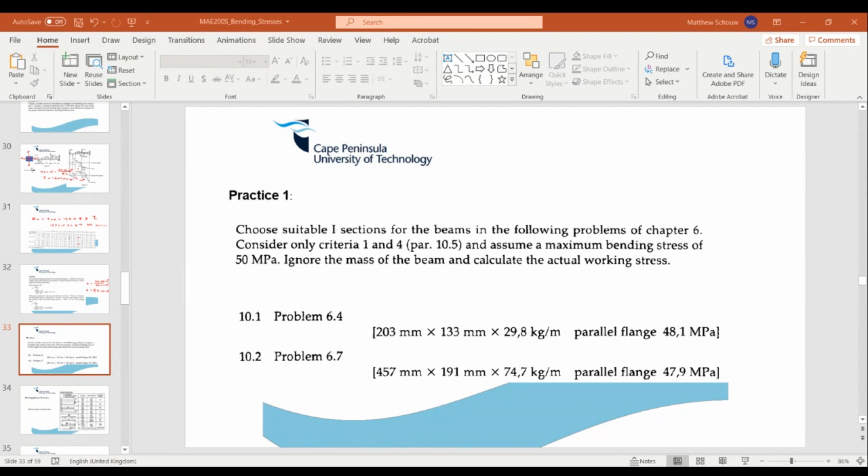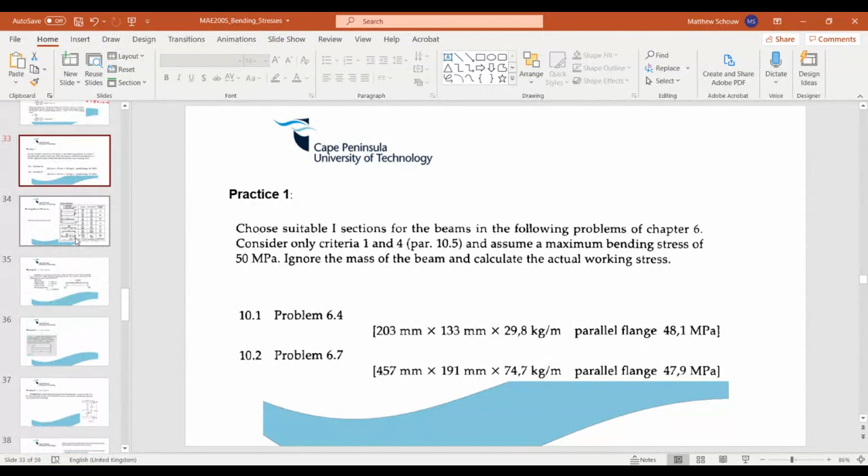Yeah, so I don't want to talk too much, but in the next section I'll start on 2 basic beam examples, and after those 2, I can do that one for you, definitely. Yeah. So we're posting at least 3 extra notes on this chapter. So please do this now. It's very basic, and then you start unpacking all the others.